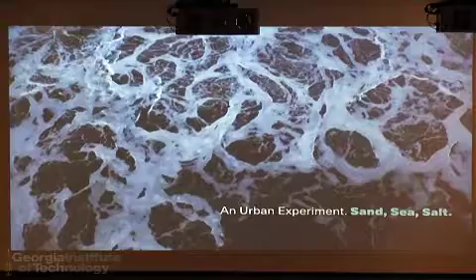Basically, this public and private dialogue needs a place, it needs political focus, and it needs a value case or a need where design comes in to make sense of it.

I hope to show you three places where, in a sense, we reframed their definitions as place by doing particular projects in areas. They're all, in this case, in New York City. One is in the Rockaways, which is a beach. One's at the Battery. And finally, one is along the edge of the city on a street called Spring Street.

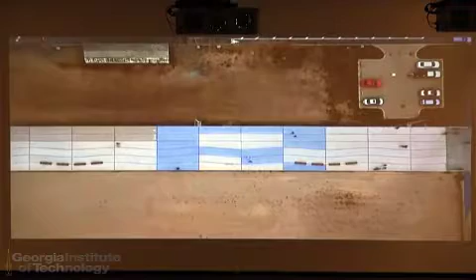I'm going to start with sand. When you think about designing something 5.5 miles long, and you're an engineer, you might think one way about it, which is how you chop it into pieces and stage it. As an architect, I think you bring a completely different perspective to it.

I think, yeah, is this moving? Let's see. Let me try the next one. There we go. Can anyone hear that? No, so I'm going to talk over it.

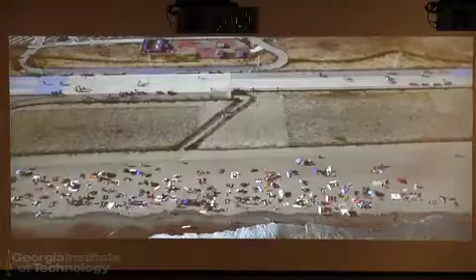I'm showing you this project from drone photography from the air, because it brings really the essential question, which is an architectural one: how do you design a line that's 5.5 miles long? It's really a straightforward question when you think about it that way. In many complex projects, which infrastructure is, there's usually something behind it that's simpler and more basic that is absolutely necessary for architects to be involved, even though many of these projects do not involve architects.

We were able to, and again this is due to a project that when a project comes after essentially the slate is wiped clean, it's an important moment to bring back to people what was there before, not only with nostalgia, but really with what kind of essential qualities you want to bring back. I think it was the case of the Rockaways.

Speaking of comfort stations, one of the first projects we had done there was this comfort station, which anyone who's gone to a park knows they're required. This is in the Rockaways, which is a very urban, very challenged neighborhood in terms of its resources. All we ever heard was, it's going to have to be really secure and you can't use glass. So the reaction to that was to actually make something out of that—probably the most unglassy comfort station you'll ever find.

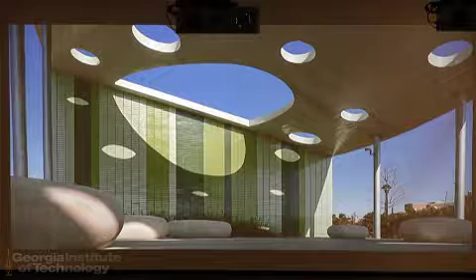So instead of using glass, we added a piece at the end, which I call the towel, which faces the beach, and allows for a kind of place-making, collective, but it allows the landscape to grow through the building.

So these are earlier on. At this point, the landscape's grown up a bit, but it also did something very interesting. I'll go back. When Sandy hit, the building had a lot of holes in it, which meant that the structure actually performed very well. So there was no damage to this building.

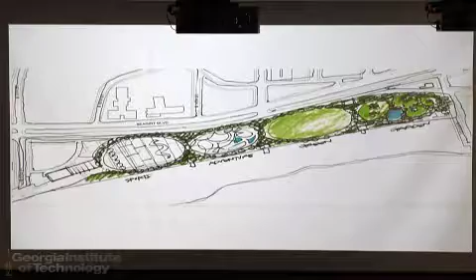It opened two weeks before Storm Sandy in New York. The kind of planning that went into originally remaking a parking lot into the park was a sort of political opportunity. There was money that went to five parks. No one thought about storms really, but they were really thinking about how parks bring neighborhoods together. And as architects, we were trying to figure out what a beach park looked like amongst a team of landscape architects and graphic designers, and what role architecture played.

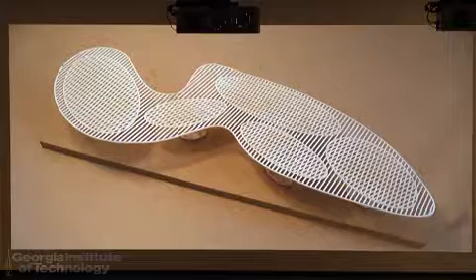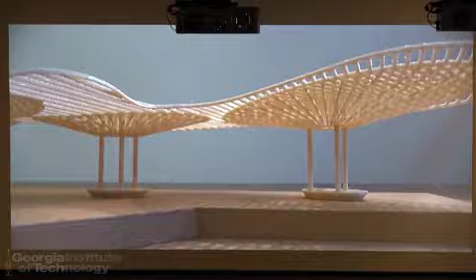And very early on, we were looking at shade structures as ultimately, whether you're in Miami, or whether you're in a New York park or in California, shade structures are kind of the language of beaches. And they tend to be, if you don't make them out of a lot of small pieces, very hard to kind of stage on a beach. So in a sense, construction on beaches can be very challenging. So we tried to propose how to do these massive structures out of smaller pieces of steel, and in this case, wood. So this was a kind of idea of a wood trellis.

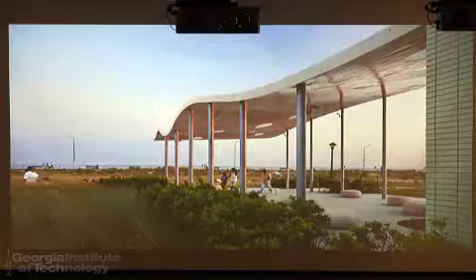This is another view back to the beach and how people use it to cut through, and in the end, how these trellis structures are kind of open to interpretation.

So now to the specifics. That was Rockaway as a park, the project that we did. But in every project, there's really a community that you're doing your project in.

Let's see if I can do this. And so when the boardwalk was destroyed and it became clear there was both money and collective will to rebuild it, kind of like Katrina in New Orleans, there's always a period after this where half the people in the room say, let's not rebuild, and the other half say, we must rebuild. That may be different a decade from now, but as architects, I think it was an important lesson for me, both in following what happened in Katrina and then when Sandy hit in New York, was to suspend jumping to conclusions without the evidence starting to pile up.

And I think as we all go through going forward a lot of change and turmoil, which we actually have been going through, but it's hard to acknowledge, I think it's important architecturally to see what some of the forces, whether they be financial, political, or even environmental, start to stack up.

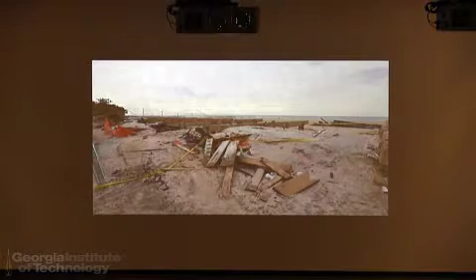Now, there's a picture of it completely destroyed. You can kind of see just the structure was left. And again, this is something you have to imagine, that's wood, concrete piers and piles, and way too low. And it kind of looks like this, except much of it is in people's living rooms.

That means you have to get back and talk to people about what they're willing to approve. At the same time, you have environmental regulations, in this case in New York, that do not allow you to use wood. So you have a problem. People's desires and dreams, the word boardwalk, right? What does that conjure up? Boards. And so it's especially compelling, I think, in architecture to know that there's a role for ideas at the very beginning that will allow all of the other things to line up behind them.

So there was an opportunity to do planning at the same time as doing essentially project solution making. So the funding for doing a plan for all the parks in the Rockaways, we did concurrently with the boardwalk. And I'm showing you images from this.

So in terms of images, how are these images different than, let's say, images of any landscape architecture, the nice images you see in a magazine?

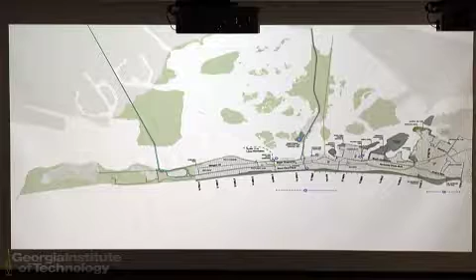One of the ways to first model that was to create a kind of people's way back out of the boardwalk, in order for the rest of the projects to be imagined as more public than they were previously. In many cases, many of these public parks, different pieces of the neighborhood have, over the years, regarded them as very private spaces.

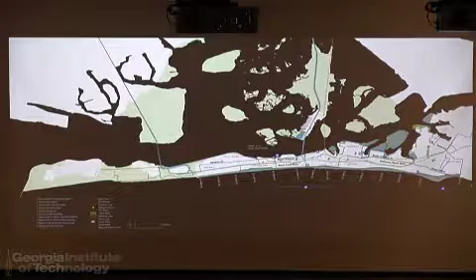So if you look at the whole map of this place, there's an area in the middle that's a blue line, and you can see this was done in phases. One of the key elements of doing anything in phases is to come up with a system.

So this is perhaps one of the unique things design can contribute: how to make beautiful systems. I would really stress that the form and language of architecture are so important in terms of designing systems that are expected to last 50 to 100 years.

You can probably tell from this image that it's spelling out something - it's spelling out Rockaway. We first thought this would just be a bunch of signs, like at the end of the street, putting an R, or doing big letters on the boardwalk, painted on.

But as this evolved, we realized there was a kind of idea of being a tourist in your own neighborhood, or having something like the Hollywood sign, or if you think about Rio and that amazing pattern - having something in the Rockaways that went beyond simply the utility of riding a bike on it.

So the kit of parts, I want to explain a little bit, is key - the structure is repeatable. It's essentially 6 structural pieces of precast, essentially a bridge.

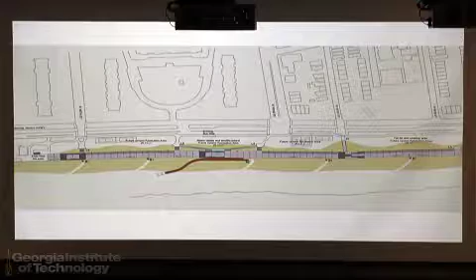Hopefully the mic is still working. There are these pieces, P1 through 6, and when you look closely at it, it essentially makes a kind of S wave.

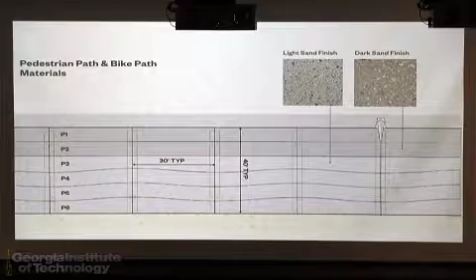But when you're on the boardwalk, and you can see the pieces going in, it makes really a wavy line. So it gets back to this idea of how do you design a line.

Maybe one of the first breakthroughs we had is, maybe we design a line that's not straight, because the environmental regulations meant that the overall shape of the boardwalk could not change. So the question is, how could we change people's perceptions of it when the outline couldn't change?

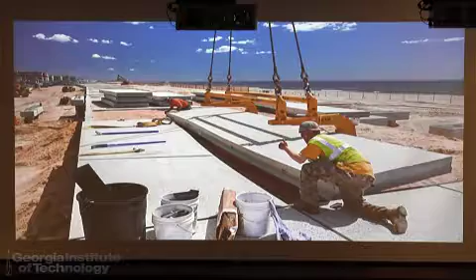So you could see it goes together kind of like a big giant Lego kit. And again, the surface and color are integral to the structure. This is completely an engineering structure.

If I walked away from this, and my friend who was the structural engineer on this, Dominica, stepped up, she'd say, that is my structure. And this is her structure.

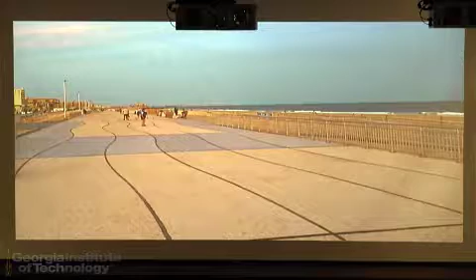But even on a dull day, that structure starts to do something at a very large scale. And you saw from the drone photography that it's also reading not only as these sort of squiggly lines that give you hints about things, but it also has this typography.

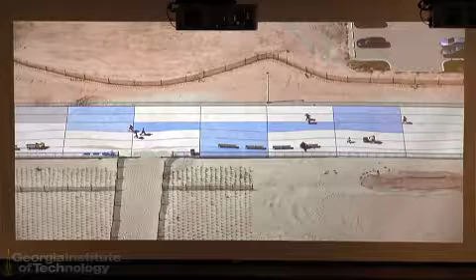So one of the things we wanted to do was, after Sandy - and they're actually starting to come in now, only now, that was 2012, it's now 2017 - Google has finally gotten its act together, and the satellite photos now show Rockaway when people are checking it out.

Because, in a sense, people said, well, I might be able to see that from the top of my apartment building, but how meaningful is that really? I can barely figure this out when I'm riding my bike - it kind of looks like a Y. But since then, it's become apparent that more people own drones.

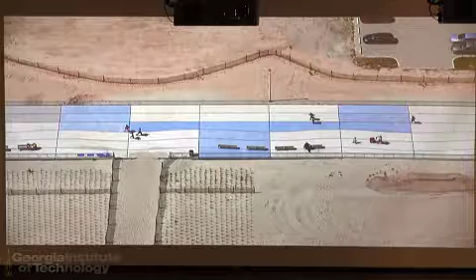They check out satellite photographs when they're visiting a place. So the audience, the definition of why this would be useful, or the value case for it, also changed.

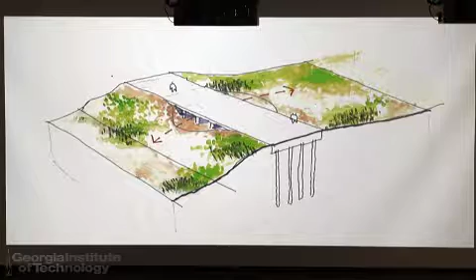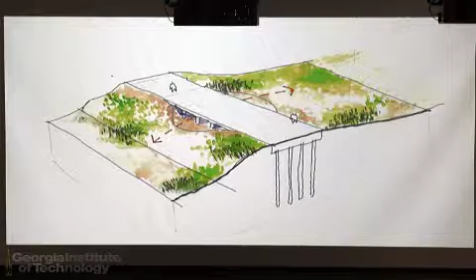So the other key piece of this is the landscape, not the board. Imagine the big problem - we said there was a problem in the line, and that the problem was not focusing on the boardwalk itself, but focusing on the landscape. By demanding that this was a dune walk, not a boardwalk, we got the funding to create an additional dune, so an added dune to what the Army Corps was doing, to create 2 dunes. I think for landscape architects, that double dune system is really what you need to kind of self-reinforce the beach. And so in the end, this is the diagrammatic section.

The railings are not necessary, I have to say, and no architect wants them, we didn't want them, but they're there because in the event of a storm, all of this dune gets washed away. And then their feeling was, since the boardwalk is much higher, they would legally be responsible for people falling off of it, which I still find really ironic.

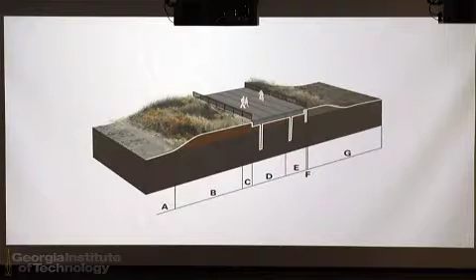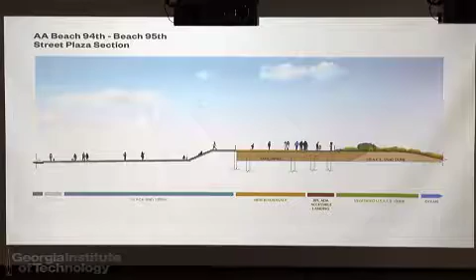So in addition to the dune on the beach side, there's a dune where you see the steps, upland. So sometimes there's steps and sometimes there's dunes. And there's a series of plantings out there that's been growing. This probably opened a year ago - this is its 2nd year.

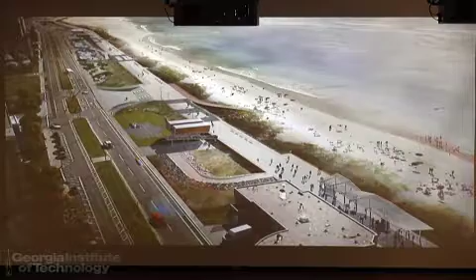It's not completely finished. Phase 6 is happening now, so this summer will be the actual opening. I show this to you because this is a rendering showing the work of a number of other architects who at the time did the emergency intervention.

So there's some lifeguard stations that were done by the city that are now going to be used as the prototype for emergency shelter. There were some arbors, and the same graphic designer from Pentagram did graphics on those buildings. But ultimately, the task of the boardwalk itself depended really on coming up with a door and window language - a language of how to make access points to it.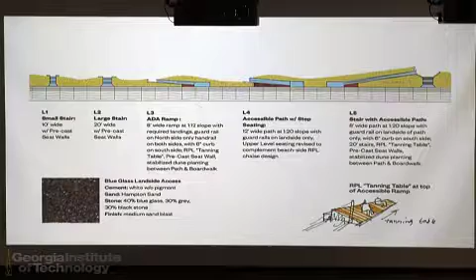These I'm showing you from the land side, from the neighborhood, accessible for the ADA, but something more - like something that works if you're carrying your surfboard, or trying to move your bike up, or have a stroller. So the idea was to think about those places, as small as they are, like simply a seat wall, an extra seat wall, as also helping reinforce the dune.

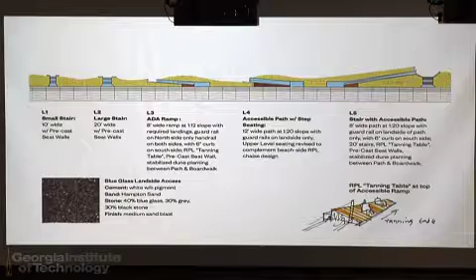In addition, you can see the sketch of how these sloped surfaces or straight surfaces - these architectonic forms - reinforce it.

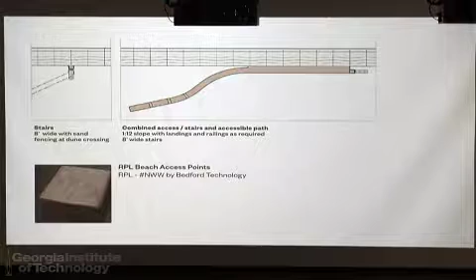On the beach side, there's two types of beach access, and this is a real challenge - it's going to be true of beaches all over the United States. Most of what we build on beaches, including in California, was built in the 60s and 70s. The ADA wasn't there, so people now in wheelchairs and people who are challenged, even temporarily, still want to go to the beach, and they're not particularly accessible.

So there's an industry that's come up with mats to make that accessible - they're called Mobi-mats - but actually if you build something permanent, it has to be accessible. So what we did in this case was squeeze out an ultra big landing, which we call a porch, in order to get some definition of threshold into the boardwalk.

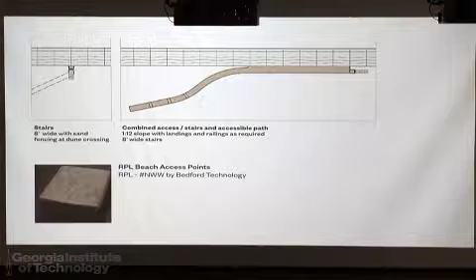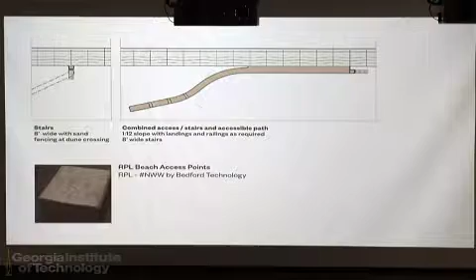And this curvy line is working with the shape of how the sand is moving, so it's also reinforcing the dune to a degree. That's how we were able to argue for not just a straight ramp off the boardwalk. In this case, it's all recycled plastic lumber. So you can see in the renderings how we tried to make a case for that.

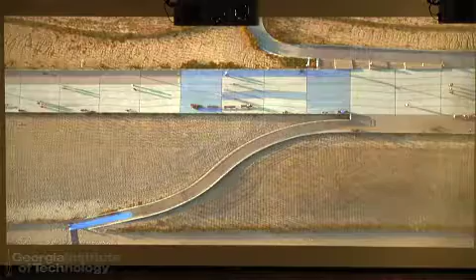And in the case of your two neighbors, for people living in their ground floor apartments who are now looking at a wall, you're also making the case to them that they're part of this larger system, and that while the stairs will be located close by, it gets into this idea that although nothing is perfect, everything you design actually has a series of consequences that you can't completely control.

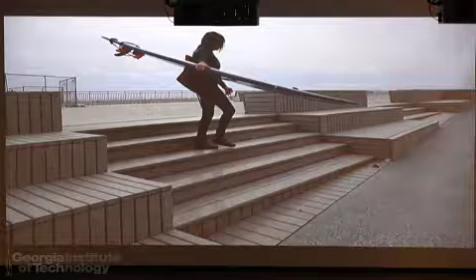So you can see the whole system there, and the kind of seating, and the sort of real version of someone using it. And actually, people surf in New York City in the winters, just if you're interested in coming to work in New York and want to surf. And then I spoke a little bit about this porch.

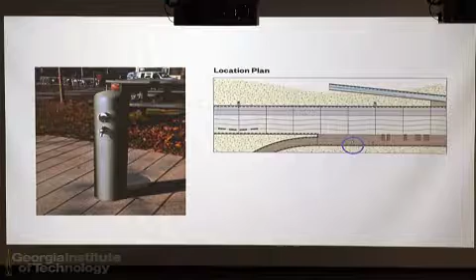So the usual accoutrements, just like in any building project, where do you put them? One of my favorite analogies is in the Villa Savoye, when you first walk in, there's a sink as you enter, and you think, why is there a sink? In a way, the shower stall, the drinking fountain, we designed these drinking fountains and now they're being produced, are that same kind of welcome, like 'here, have some water,' a bit of welcome at the beach.

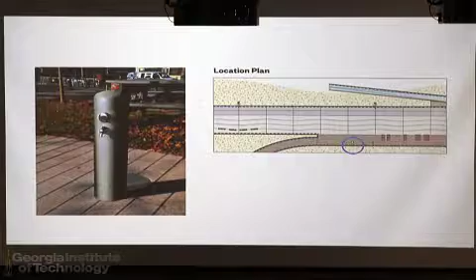And they're located in a way that, with seating, looks out at the water, but also kind of welcomes people coming in and off the beach. And you can see these drinking fountains.

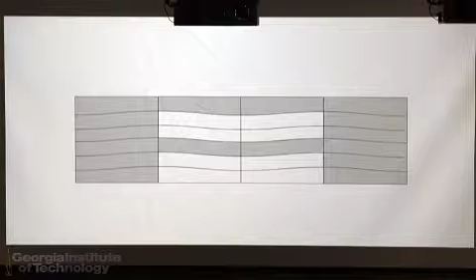Finally, I want to talk a little bit about this system as an alphabet. So the fonts, the idea of making a shape as an architect - determining that shape will result in a certain kind of wiggle, or wave. It was also interesting when Paula Scher of Pentagram said, 'I can make a font out of this.' Of course, getting people to make blue precast concrete was difficult, but it's an interesting perspective to think about something that is both literal and not literal, and yet is a real point of pride in the Rockaways now.

And for those who have taken graphic design, there's always something called the bag test or the t-shirt test, and whether, in a way, the brand will pass the t-shirt test.

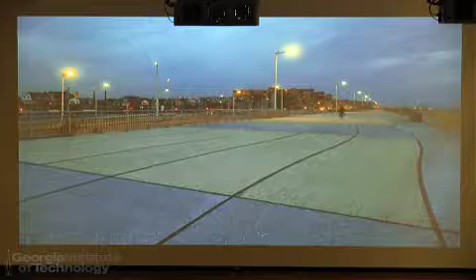The other kind of wrinkle that we managed to put into this was an experimentation with a material that's actually hard to use in cities, and much easier in places like campuses and rural areas, which is glow-in-the-dark material. So there's a whole set of paints and aggregates out there now that absorb light, kind of like your old glow-in-the-dark toys when you were a kid, and then emit light in the evening.

So we managed to get a fair amount of glow-in-the-dark aggregate into these blue letters. And interestingly enough, because there's still a lot of light required from the lights, you can't really photograph it - it's not that strong.

But it is strong in the sense that it has something coming out from it that's a bit indescribable, and it relates to what's really happening on the beaches, which is the sea life shedding its cells, and it's really that bioluminescence that we all see in oceans and beaches. So the idea was to bring that biological photoluminescence response onto the boardwalk and see if there would be any kind of effect.

So this is the glass aggregate, the recycled glass that's in the ramps. You have to go out there to actually see it - they look like white aggregate, and then at night they turn blue. You can get this glow in the dark right now most reliably in a kind of blue cast or a green cast. Okay, so C.

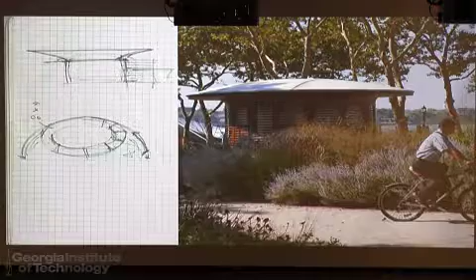This was right before the High Line happened. This was the first garden that Piet Oudolf, who designed the gardens for the High Line, did in New York - second, he did the Lurie Garden in Chicago. Our sense was, if it's only the landscape and the architecture doesn't merge to become something with it, there would be a lost opportunity for making this park something really for the whole city, because in this case it needed to go beyond a neighborhood park.

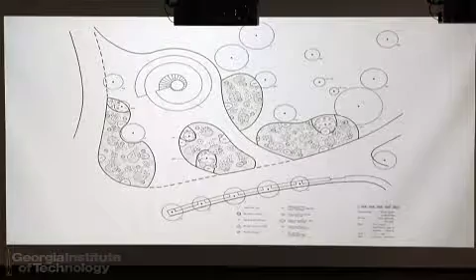The project has a garden designed by Piet Oudolf that was actually paid for by the Tiffany Foundation. What's interesting about it is that it tries to be as ocean-like as a garden can be. If you visit it, it's kind of interesting.

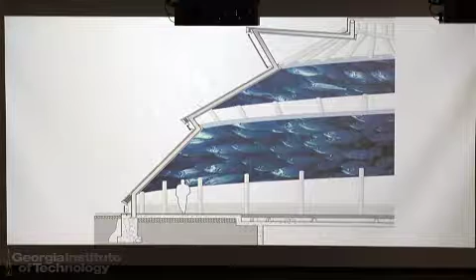The idea of the carousel was to put all the machines below, but to create many axes of motion - using wheels and turntables so you could create this yaw. Essentially it's more like boat technology, but the idea was that, fine, you can go around, but if you could actually get a kind of swivel to happen, you could get a sense of weightlessness out of it. It's really more of a tool - it's not really a finished work at this point. It's only had one or two rides designed for it. The hope is that in the future, many artists will come in and change the motion, change the lighting. So in a sense, we made something that was a system for others to work with.

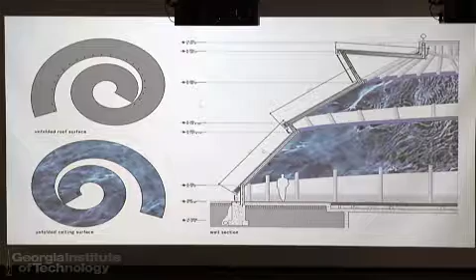These show really the kinds of drawings - although we did it in BIM, we had to then export everything into 2D. This project was done with Mark Simmons, who many of you have had as a professor. It was probably one of his earlier projects. The interesting thing was trying to work out - for a while we thought we were going to get smart glass, where the glass could also dim, that it could be electrified and dim. In the end we didn't do that because the pieces of glass were too big. But it required, for something that as an architect you look at as relatively simple - an open air structure - we had ambitions for it to do better than its outdoor environment.

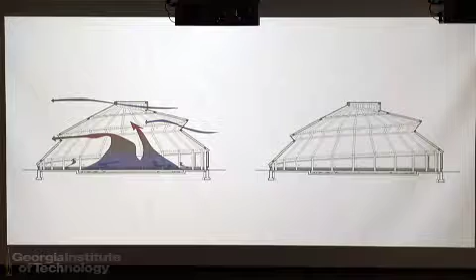The idea was, both acoustically and in terms of climate control, to design louvers and an exhaust fan at the top, so the carousel itself would act like a big fan going around in the park. The energy used for it would also cool the environment for the equipment and the riders. Many enclosed carousels that need to run through winter in New York are air conditioned, which requires a vast amount of energy. So the idea was to use the natural movement of the carousel instead. Buro Happold, the engineers, figured out a louver system that would use the fan to speed up the air to do this.

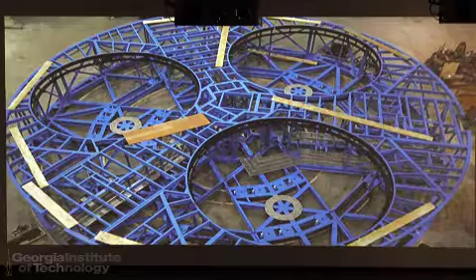That's why in the end it doesn't look as simple as the renderings we started with. This machine in the garden is really a lot of machine, considering. And the figures in the end were one of the more difficult things.

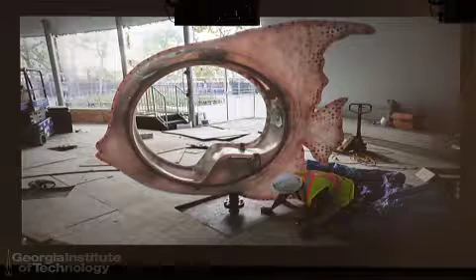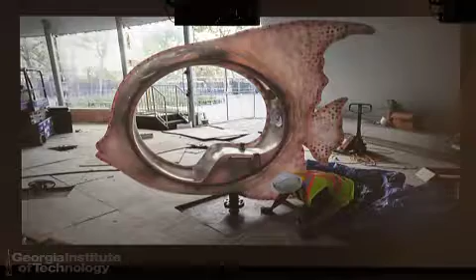We collaborated with someone trained as an architect, George Tsypin, who designs operas and also designed the Broadway show for The Little Mermaid. It's really a lot about collaboration. He looked at the project, and we had clear dolphins as the stand-in. He said, I think you have it backwards - you are the fish, you're not sitting on the fish - which I thought was an incredible insight. We were then able to develop with him figures that were apertures, so you really were inside the fish figure.

Equally with designing the lighting system, instead of going into a theater like this where you generally see giant arrays of lights and projectors that are really horrifying, which architects try to hide, in this case we tried to optimize them and create a shape that worked with the roof but also offered full coverage for all the projected surfaces. So when you go in, there's a kind of projected water you're in, with lighting control, and it has very different day and nighttime personalities.

Okay, and you can see that where it is.

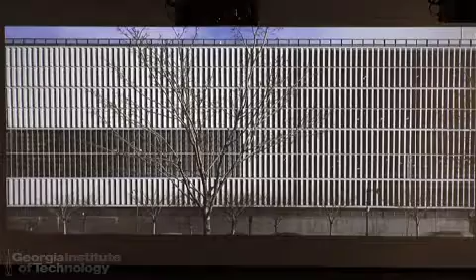Finally in this part - and I'm going a little slow so I'll speed up - is salt. How much do we all overlook salt, right? Salt, as everyone knows, used to be traded like gold, and it's still absolutely essential for human life.

At the same time, in New York City, we import salt from Chile in big boats, pile it in buildings, and when snow hits, we put it in vehicles that race around New York throwing salt on streets to melt snow. The other thing we do in New York City is we don't have enough room to hide our garbage trucks. We produce such a huge amount of garbage that we have fleets of garbage trucks and street cleaners all over the city. And no one wants them in their neighborhoods - garbage trucks smell.

So when we were first working on this project, I'm going through the two pieces of it here quickly with some photography. When we first did this project...

There was a giant lawsuit. Even though it had gone through all of its public approvals and was part of the city's larger waste management plan, the property owners next door who wanted to develop residential condominiums, even though the entire area is zoned industrial, sued the city - actually two or three times. The city's response, because we have a strong mayor system in New York, was that the mayor agreed with the head of city planning that they were going to stay the course: they were going to buy this site from UPS, let UPS stay there, tear down the old tiny garage, and build a salt shed there.

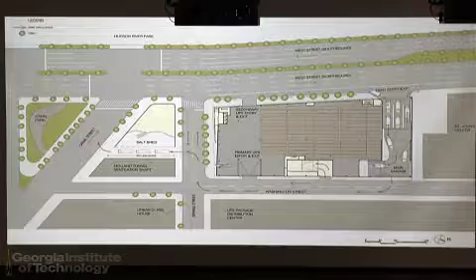So we felt that doing these two buildings, and you can see there's the salt shed and there's the garage, and it's right on the edge of a highway where a lot of people go by, that this was a chance for sanitation to essentially take the front seats. That there they were, and instead of hiding, which is that really most of their buildings kind of get hidden in industrial areas, was to try and figure out how the bigger piece could show the flows of activity better, and the smaller piece could be about the idea of immovable public investment in shared, in kind of things that we do better together than alone, right?

So I can promise you, organizing as a group of people to pick up garbage and to do snow is much better than all of us going out there and being assigned pieces of streets, at least in New York. I don't know how it works in Atlanta. And so that was something I think everyone could agree on.

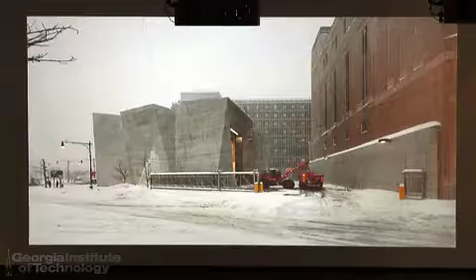And so even the neighbors, including many celebrities like Laurie Anderson, who were part of this lawsuit, I got a chance to kind of walk her through this project right after it opened. And she was kind of dazzled by it in a sense. She thought the salt shed was like the best museum space in the city that had been built in a while. But it also performs, this doesn't look like Atlanta, right? This also performs in the extreme conditions it's supposed to perform in.

And it has a kind of acceptance of its scale, and this has a lot to do, I think, with form and proportion, on both sides, and this is the rest of UPS, and even as the project to our right will eventually be kind of retail and high-end condominiums. It's been announced recently that this will be towers with essentially these buildings can stand up to still being part of the city.

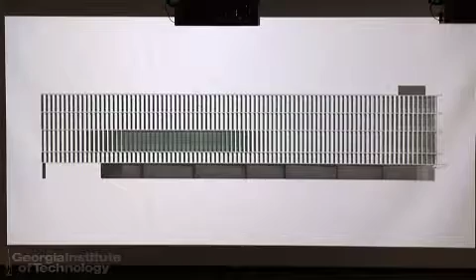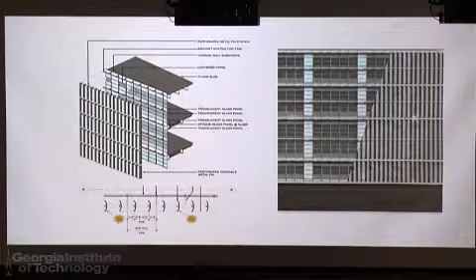And this is kind of the manned spaces. And what I want to point out in showing you our earlier renderings, even though the end is slightly different, and the brick looks slightly different, there was always this idea that people could tell where human activity was happening. So where you see that green at the corner, in fact, these louvers are controlled by a motor, and they track the sun so that they close when there's too much sun hitting the windows. And so they constantly are moving, especially towards the end of the day and the middle on the south, so that there's a sense of something happening in a building that's essentially unmanned or static.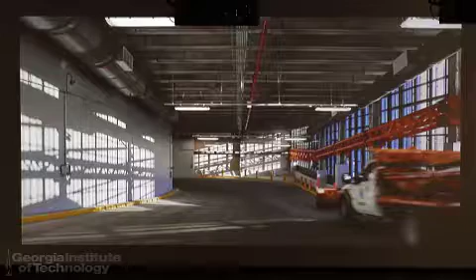And equally, the kind of scale of the people spaces, you can see the office spaces to the right are kind of mezzanine into what's a 35-foot clear floor-to-floor height in this building. So these buildings, all photographs make these building sizes look small, but these buildings really do feel like museums, actually.

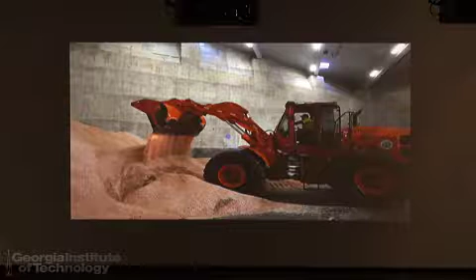And I would say that if one of these days we manage to pay enough and figure out how to not produce as much garbage, our hope was that these two structures would still be valuable to people, and there would be other ways to use them. And I think that's kind of what's important about thinking about typology not as an end in itself.

And this is Mierle Ukeles', and to end the Mierle Ukeles story, she's got the first, it's still up, solo show the Queens Museum has ever done, and that's the first show of her work, and it's actually an incredibly moving show if you were ever in New York.

And also the Salt Shed got the first ever fashion event. This is Heron Preston at the Salt Shed, and they asked him in particular because he's a no-waste fashion designer, and New York City has embarked on an initiative to eliminate New York City's sending waste to any landfill, including Virginia and other places, by 2030.

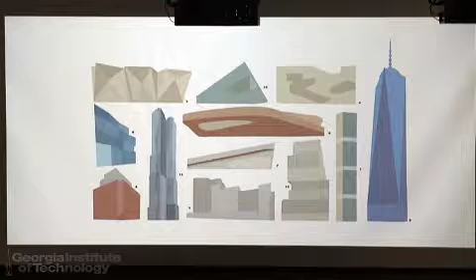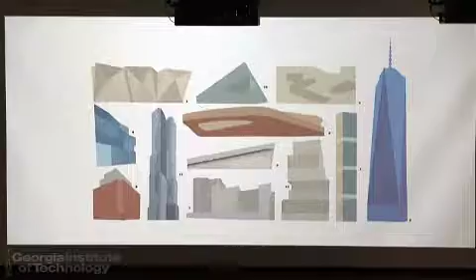So I want to just do, the time is moving on, but I want to do the last piece of this, kind of more about thinking about planning and both the plan of architecture and planning. So this shows just Salt Shed, and we obviously can look at buildings as powerful icons, this was from a New York Times article, The Shapes of New York. And we can kind of look outside, here's a website of all this stuff, and not really understand it.

But actually, some of the questions that are these big, giant questions that we think we can't solve, I believe are very much in our power to work on.

So I think some of the work that we've been doing lately is something Atlanta, you all deal with all the time, which is what I call the parking space. It's as true here as it is on the East Coast, which is your average car is only used 5% of the day. So what do we all think it's doing the rest of the time? I mean, it's being stored somewhere, right? And we architects have to figure out where that is.

So Uber is, I use Uber all the time in Atlanta, Lyft, other things. It's become, people have become are starting to realize that as much as we think we can solve everything by changing people's behavior, it's a lot easier to get them to do stuff they want to do anyways, like take an Uber instead of driving their car and not being able to talk to their friends on the phone easily, or being worried about where to park a parking space.

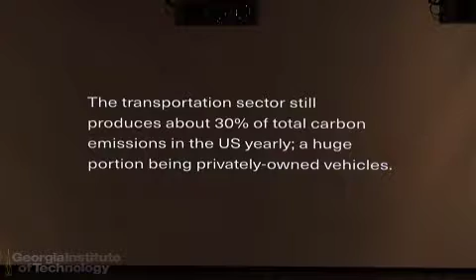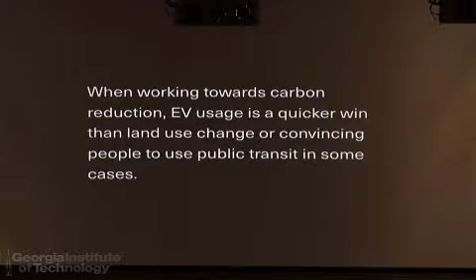So knowing that, basically the transportation sector produces about 30% of our carbon emissions, and a lot of it is just basically personal vehicles. That quicker than trying to kind of change zoning or land use might be to change our relationship to cars. And I say that kind of as an architect.

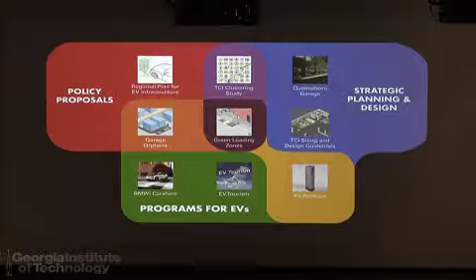So part of some of the projects that we're doing are actually what I call programs. So instead of building something, we will run a program and see what happens. I'm going to explain a little bit what that means.

So for BMW, we kind of spent the last year, 2 years, meeting with developers and talking to them about whether it would be useful for them if we could get the cities to agree to reduce the number of required parking spaces, and a developer can offer a personal building level car share from BMW with electric vehicles, and BMW has an app, it's very fun. And what would that take, and what would the city agree to?

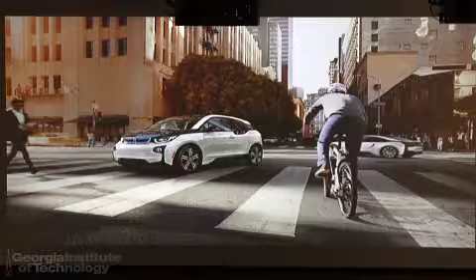So the first test case of that is in New York City in Battery Park City, which does not have required parking anyways, at the Solaire. And in New Rochelle now, New Rochelle has put in their building code that if you have car share in your building, you can reduce by three parking spaces. To us, that's not very much, because our research shows that actually it's easily 12 - you could easily reduce by 12 parking spaces, and I'm sure there's lots more to argue about it.

The car doesn't necessarily have to change shape to have value for people—a lot of the value is in not necessarily needing to own a car anymore, and then it gets plugged into these other systems.

The other program we ran, and hope someone else will run going forward, was called EV Tourism. The idea is you take a train, using an app we designed for them—not super attractive, but clear—and you get a reduced train ride plus a key to unlock an electric vehicle when you arrive at Beacon, Storm King, or an art park up in Massachusetts. This was all for New York State tourist destinations. You get in your electric car, drive around, return it, and get back on the train. Not only have you not generated the carbon you would have otherwise, but you got a reduced rate ride and got to go to Beacon.

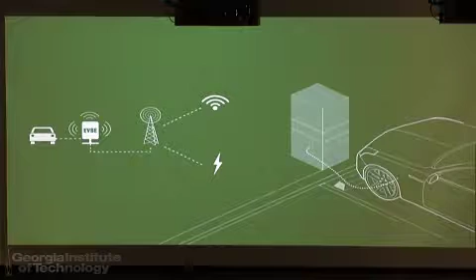Same thing with this—there's a company that makes pedestals. Who here eats from food trucks? You know how food trucks run diesel engines, which is really nasty because they have to keep their equipment going? There's a simple fix: a pedestal using electric energy from a clean source that a food truck can plug into, or ambulances or anything else. We rolled this out in East Hampton, and we're now expanding the idea of electric pedestals to other places.

And finally, some of these other images show what's called electric vehicle supply equipment. Because of this work and running these studies and programs, it's now required in New York City that you can reduce the number of parking spaces you plan for a parking lot if you include electric vehicle charging in it.

So this gets back to our own projects. We were in the middle of a parking lot project for New York City, which we were designing as a giant bioswale, and the only way we convinced the city was by pointing out that the building code now requires electric vehicle charging. We felt guilty because we knew it was our fault that it's in the code and no one knows about it. But it proves the larger point that reducing a parking space by even 2 or 3 can have lots of positive consequences into the future.

I'll skip showing much on the Strand and just talk about diagramming the value case. I think one of the most important takeaways from our work is that both users, the public, and the private sector ultimately all have to have reasons for wanting to do things. As architects, our real talent is being able to create—not just through words, but through forms—things that people actually feel connected to and desire.

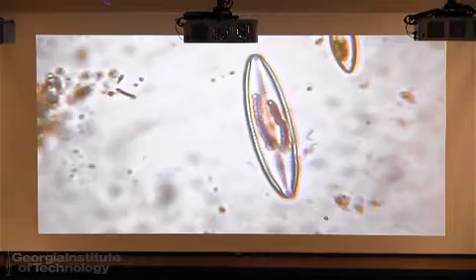So I'm going to leave you with this last little—oh, I missed the diatom movie. He's so cute. Okay, let's see if I can make him move. There we go. Okay, thank you.

I don't know if you guys have any questions, or if we should just go to the gallery and you can ask me.